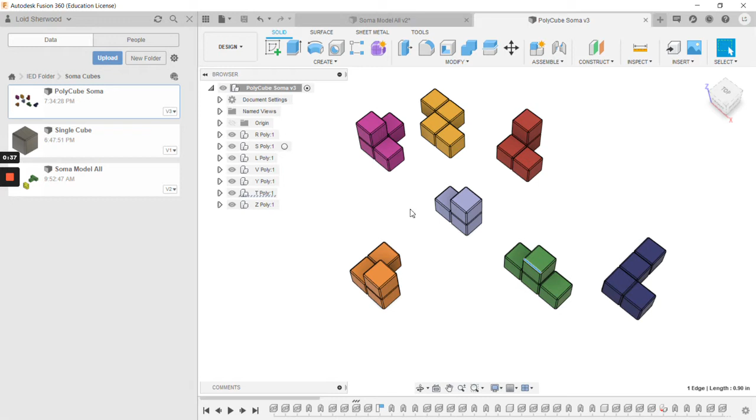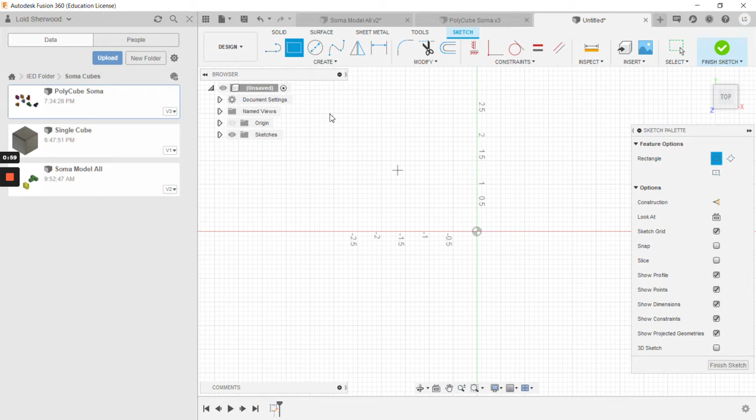We're going to start with a new model and create a cube like I did before. I'll start with a sketch, making these 1 inch by 1 inch using a rectangle. Actually, I'm going to use the center point rectangle, up here under create rectangle. I'll make it 1 inch, hit tab, 1 inch, hit enter.

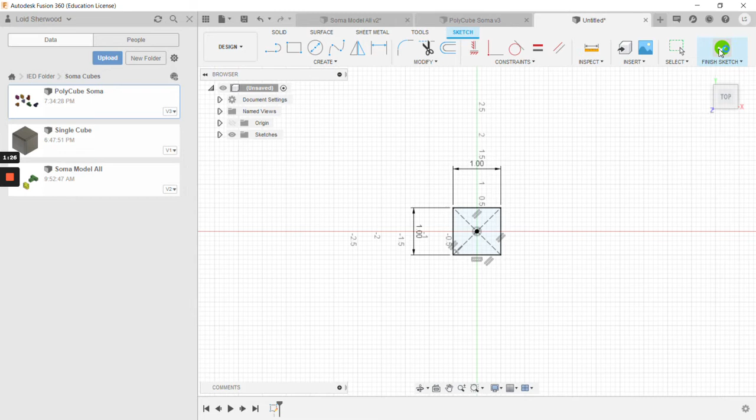Then I'm going to finish my sketch, and extrude it 1 inch, and click OK.

Notice in the browser this square means it's a component and it's unsaved, but it's also showing bodies here. I'm going to save it, and call this the cube since I already have a single cube over there, then hit save. We still just have this body, which is fine.

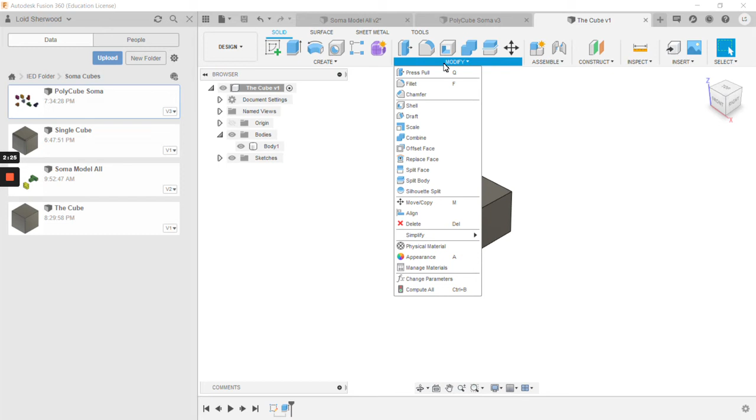We're going to do some other things to it. I'm going to chamfer the edges, so when we put them together in the polycubes, we can see these different blocks more distinctly. I'll do a chamfer and select all the edges of my cube.

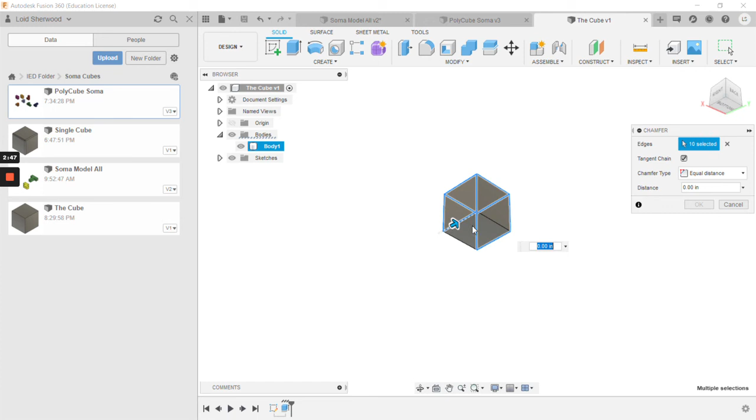You can maneuver the view cube around to hit the different edges. If you do it right, you can actually do them all in the home view. I believe I have all of them. It says 12 selected, which should be as many edges as we have in a cube.

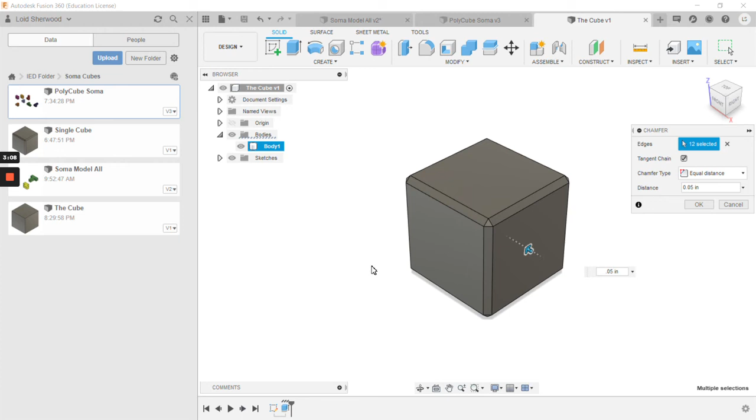We're going to make this 0.05 of a chamfer, so it does those edges like that. Then I'm going to click OK.

Now this is the cube, and we don't really need that open right now. Well, we will be using it, but we don't need it open currently. I'm going to hit save just to make sure it's saved, then click OK.

One of the differences from the previous parts you've done is they've stayed basically as bodies. Even though this is saved and it's really a component here, we have bodies here, and we can talk about that some other time. But once we save something, it is a component, and also bodies we can't assemble together. We can combine them, but that's different from assembly.

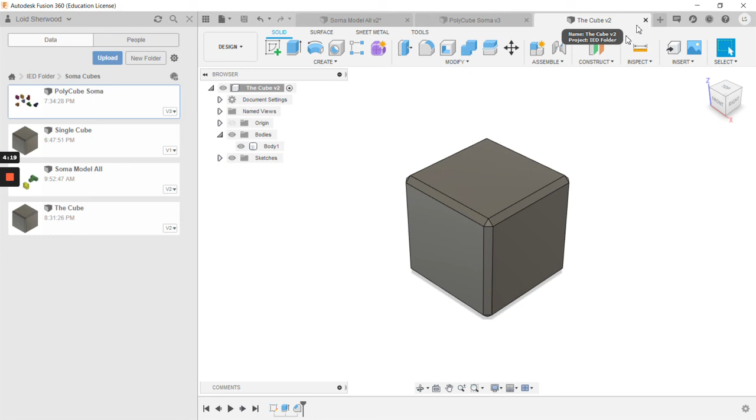We're going to actually take this cube and assemble other cubes, so I'll do that in the next video. I'm just going to go ahead and end this one and then start the next.